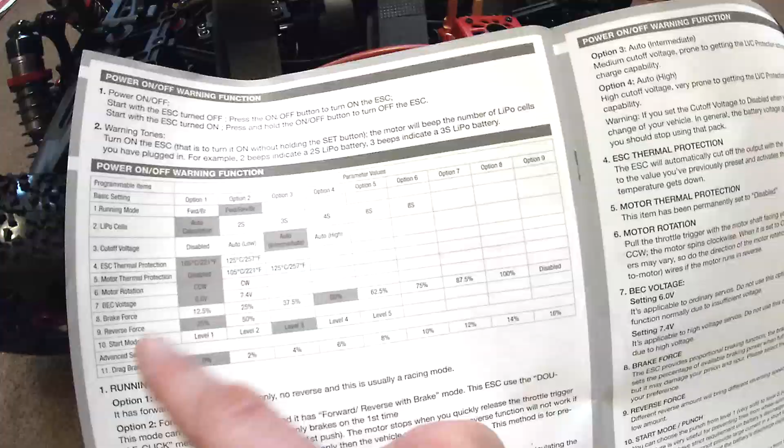Apparently it's, according to the manual here, you've got this programmable thing, it's quite a good manual. Apparently it can go up to 8S apparently, but yeah it's interesting. But this is if you want to have a quick peek at this, if you've got a max 8S ESC, about 90% sure at least.

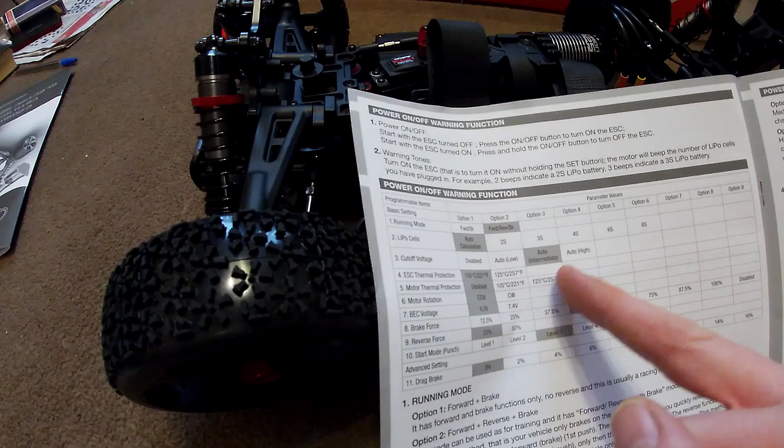So yeah, it's pretty good. You've got your running mode, if you're not sure what that is it tells you there. You've got your forward and brake, your cut-off voltages. Rather than give you a preset voltage like 3 volts per cell or whatever, you've got auto low, auto intermediate, or auto high. The usual stuff, your drag brake, your start punch.

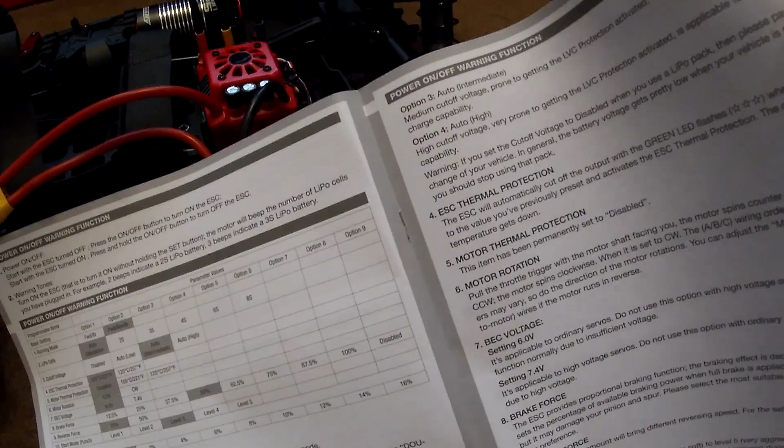If you're not sure, everything's written down there to explain it to you if you're new and don't really understand. For argument's sake, the BEC voltage, if you don't know what that does, it'll explain there. It can go up to 7.4, by the way. So there's that, and the manual's quite cool actually.

Just bring your attention to something here, try and be as quick as I can. It's quite a good manual, quite comprehensive. You've got the quick start guide, your do's and your don'ts, and test your range before you run it.

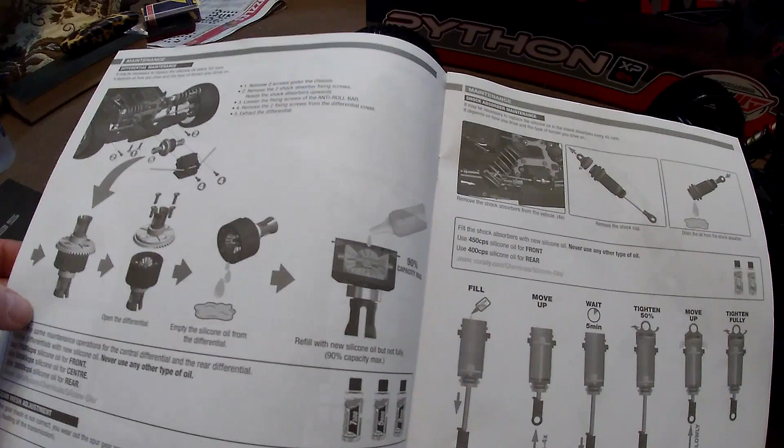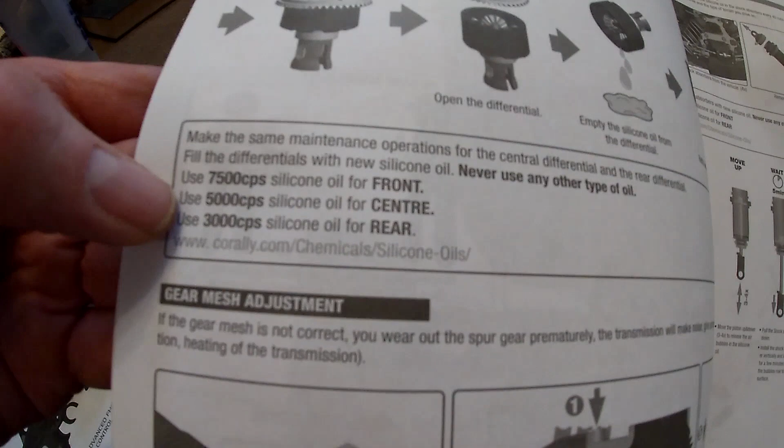They say like every 50 runs you should change your diff oil. Well, I've never known that one, but 50 runs they say you should change your diff oil, and they've given you what they use here: 7,500 for the front, 5,000 for the centre, 5,000 for the centre, 3,000 for the rear.

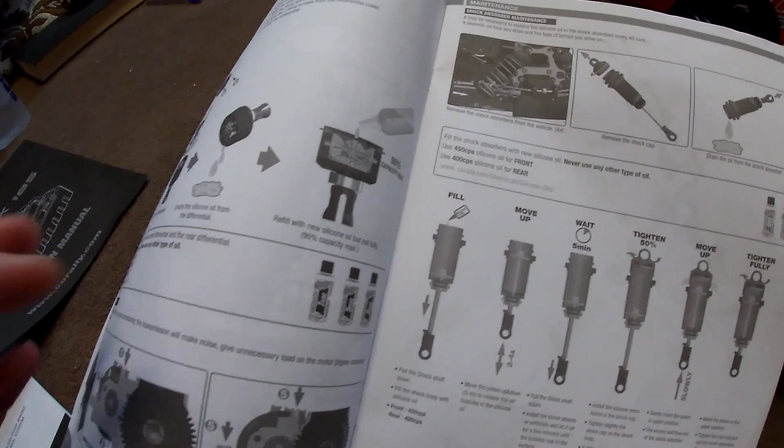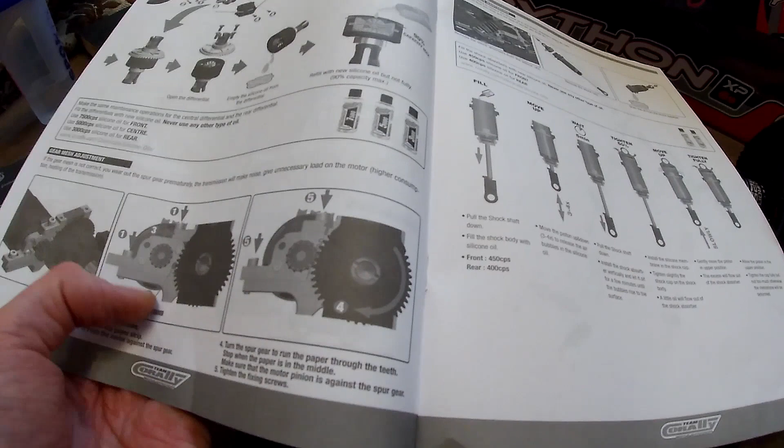It shows you, like, if you're not sure - some of the Arrma motors have motor mounts with preset holes where you just fix whatever pinion you've got into the right place, whereas this you have to mesh up yourself. So if you're unsure, it explains to leave a little bit of a gap there.

So it's quite cool. As I say, the suspension I think is a bit light, I'm definitely going to change that. There's 40 in the rear, 45 in the front, or 450 cps, depends how, whichever way you want to read it.

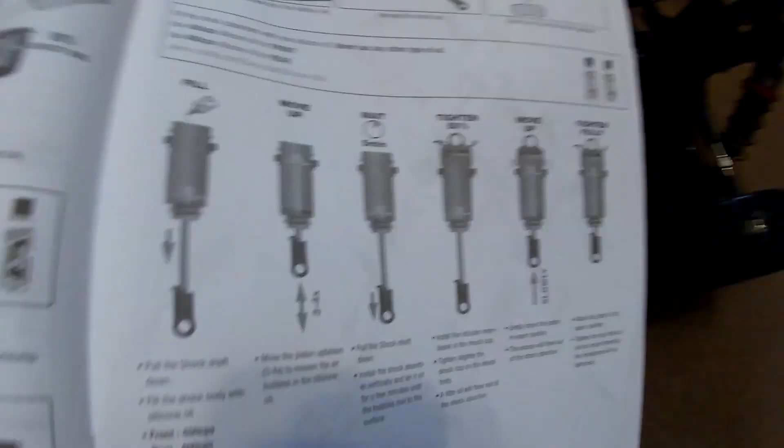Here it shows you how to do the dampers and everything if you want to change the oil. I think they recommend changing this every... oh, every 40 runs they recommend changing that.

So yeah, you've got your exploded diagrams, got your bits and bobs there, your part numbers. You can look up the part rather than having to sort of look it up as a wording, which can sometimes be confusing. So yeah, it's a good manual.

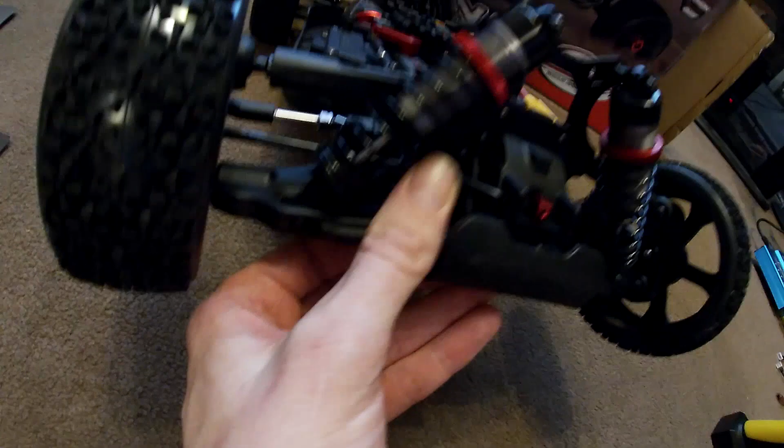As I said, the suspension is a bit light for my liking, I think we're going to have to change that. We've got anti-roll bars here, anti-sway bars. We've got metal shocks, metal adjustables there. Got metal shock towers, front and rear. We've got pillar ball suspension. We've got universal drive shafts at the front.

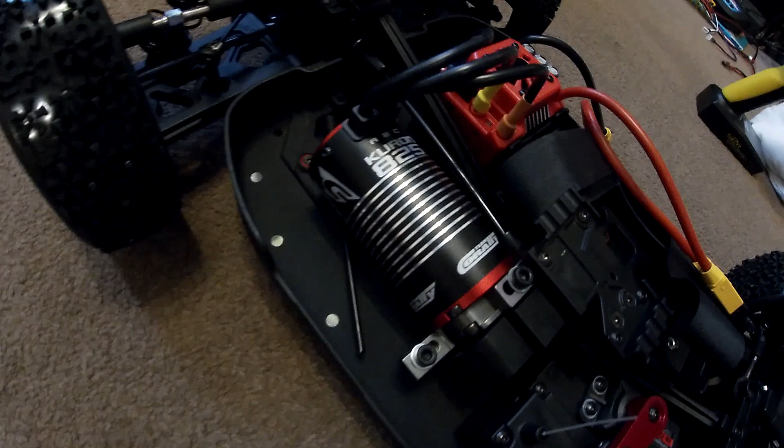We've got a 20 kilogram metal servo, supposedly a torque servo. Comes in a waterproof box for the receiver. We've got this Kuron 825 motor, I think it's a 4274 size motor, 2050 kV.

It looks identical to, just like a rebranded Hobbywing, if you ask me. Hobbywing Max 8 combo, pretty much. I might even try it. I could probably plug my programming card in for the Hobbywing, but I find it just as easy to do it with the set buttons there, if you understand how that works.

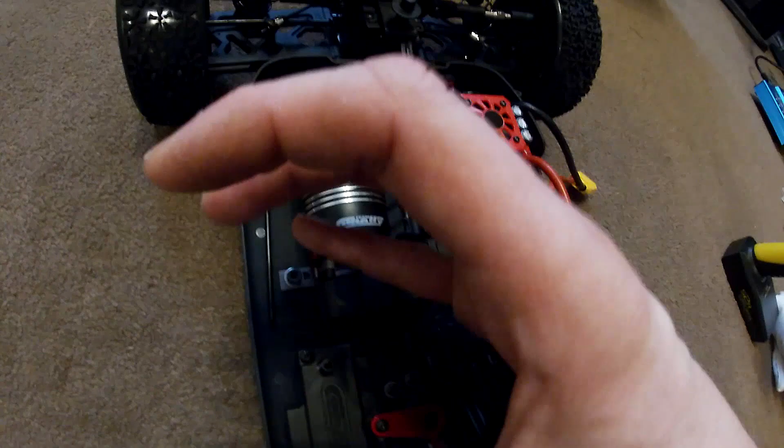Got the centre shaft here. This is looking a bit skewed. It's over sort of a bit to the left or to the right, whichever way you want to look at it, looking from the front. It comes down, comes in, comes across at an angle, and the front one comes off, comes back in. It's a bit weird, but as long as it works, I guess. I don't like them like that, I find it puts a bit of unnecessary wear, but as long as it does the job.

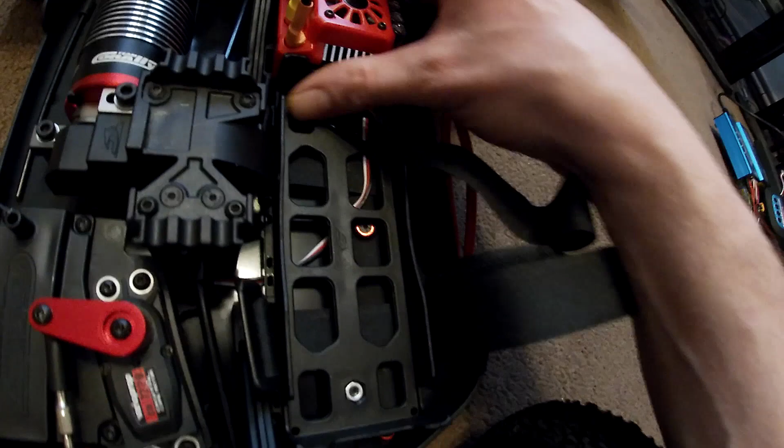Very similar in some ways to my Hyper VSE. I don't like this battery tray, I don't know why they're giving you such a tiny battery tray. If they just thought to move this ESC back a little bit, just a couple more mil, because I have these batteries.

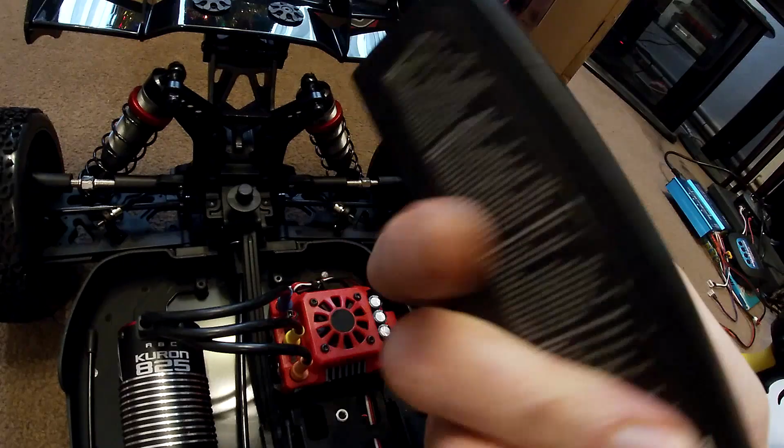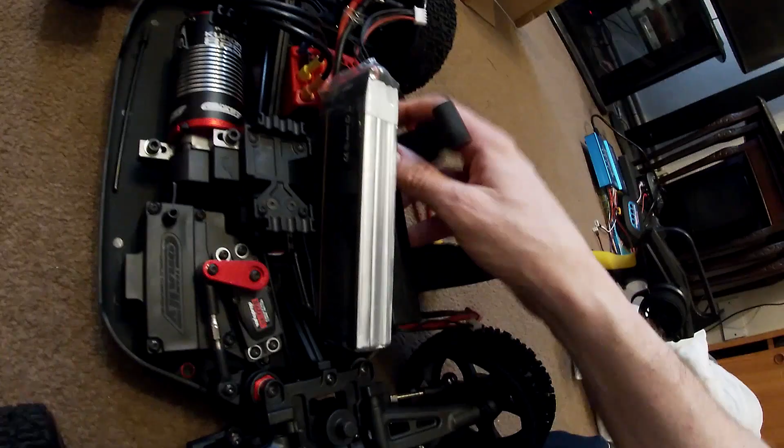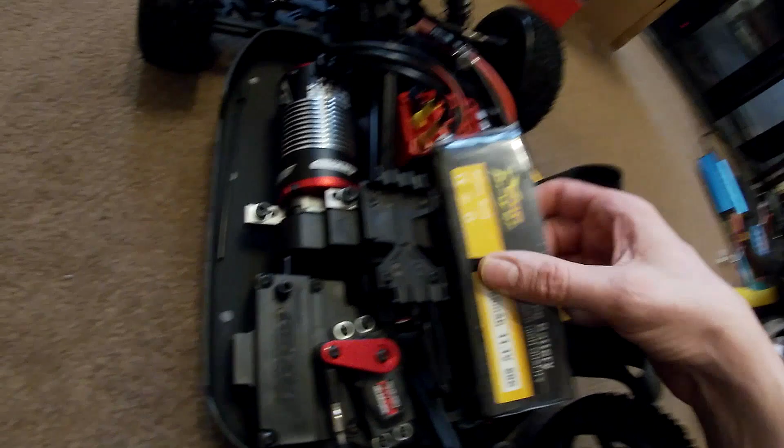I bought these Zops, and they are just ever so slightly longer, these 3S's, than the standard. This is sort of like your more regular size battery, and again I just don't know how you're gonna get them in - well, it's got a little cut hole there, so you can definitely get them in there. Will I get two in there side by side? Yes I would, but the problem is you're gonna have to buy small batteries because they're just not long enough to fit some of these in. These aren't Traxxas size, the Traxxas ones are a tiny bit longer, but they're close. But yeah, it just doesn't quite fit.

What a bummer, these are my 3S lipos, and they just don't quite fit.

Oh well. So on the rear we've got metal adjustables here. How does this sit with the body shell on? So if you put that in there, put that standing up. Grab the body shell.

Yep, I think it will sit fine. My Hyper tends to have the body shell sort of sitting like that because of the batteries in it. It's got a really tiny body shell and a bit of a short back trail. But yeah, there's what it looks like, and there's one nosy cat.

Straight into the box. Wait, nosy - cat loves a box.

Right, so there we go, that's the - there you go, there's the Hyper, there's the Python. It's got quite soft tires on it. Yeah, got a metal chassis underneath. So yeah, I'm sure it'll be a good car.

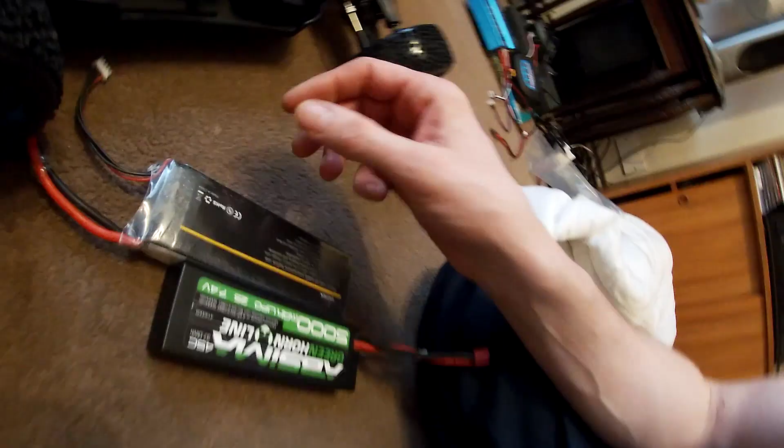Oh, and I forgot to mention - we got, did I mention it or not, a 20 kilogram servo with a metal horn. So yeah, should be good, can't wait. I don't know what pinion's on here stock, I haven't checked, but I believe with a 20 tooth pinion it can get up to close to 70 mile an hour, a good 65, 67, something like that.